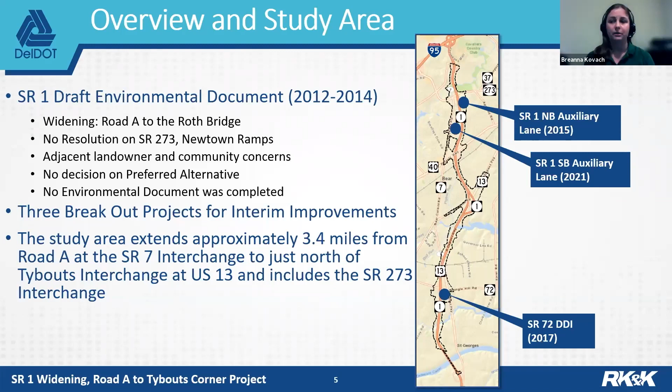Next slide, please. So the purpose and need of this project, why we're here, why we're doing this. If you drive this road every day, you see we're here to address existing and future traffic congestion on SR1, between Road A and the Tybouts Corner interchange, during AM and PM peak hours especially. And with the needs, accommodating those existing and future traffic, improving the travel times, especially by eliminating those SR1 bottlenecks. A big one that we see today is at SR1 and 273, so we're really trying to improve the operations and safety at that interchange as well.

Next slide, please. So I just want to start off too by mentioning that this map is rotated 90 degrees, and you'll see the map rotated in future slides as well.

To the 90-degree rotation. So just to orient yourself, it fits a little bit better this way on the screen.

So what this project includes versus what it doesn't include that maybe the previous study had included. So just to reiterate, we are including the widening of SR1 from Road A near that mall to just north of Tybouts Corner Interchange. It also includes the construction of the new Newtown Road ramps, and the reconstruction of the SR1 and SR273 interchange. What this project doesn't include at this time is the reconstruction at the Tybouts Corner interchange where 13 and SR1 come together.

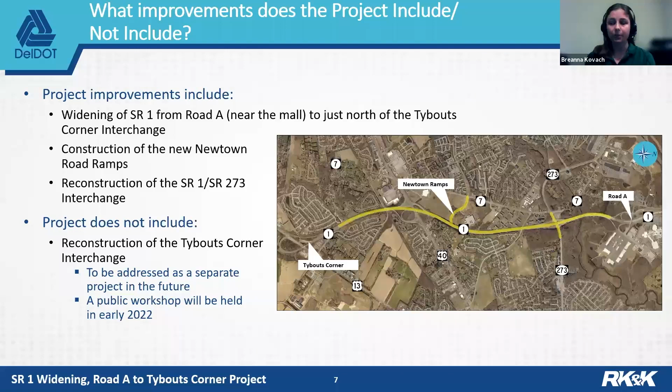So with that being said, I'm going to turn it over to Carey at this point, who's going to talk to us a little bit more about the design aspects of the project and give you a refresher on the alternatives.

All right, great. Thanks, Breanna. So again, as Breanna just mentioned, there are really three main components to meet the purpose and need for this project. A little bit bigger map: we have SR1 widening, the new Newtown ramps, and the SR1 and SR273 interchange reconstruction. We're going to talk about all three here this evening.

SR1 is an existing 2 through-lane section from Tybouts Corner up to Road A in both directions, with some of those auxiliary lanes which have been recently constructed. Next slide, please.

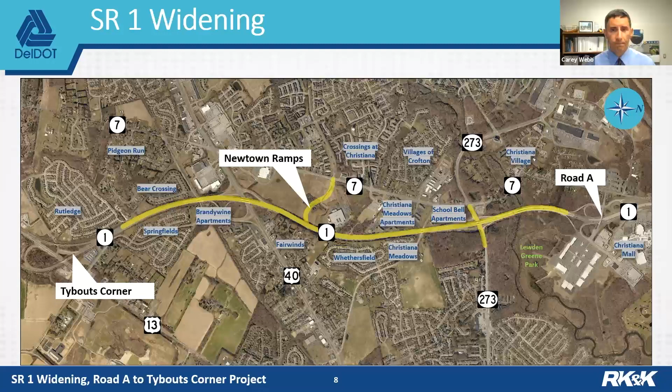Just showing a cross-section of the SR1 widening. This is taken between the Newtown Road ramps and 273, looking towards the north. In this slide, the existing pavement is shown in black, and the highlighted areas indicate the new pavement widening in each direction. So the widening will provide 3 through lanes in each direction with auxiliary lanes between the on and off ramps, as well as full shoulders. Please note that the widening would occur within the existing SR1 right-of-way. Next slide, please.

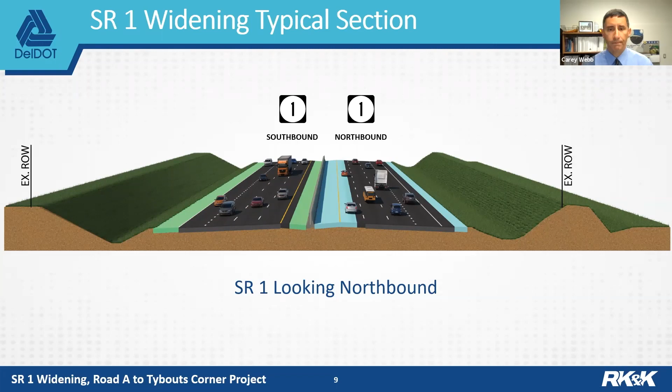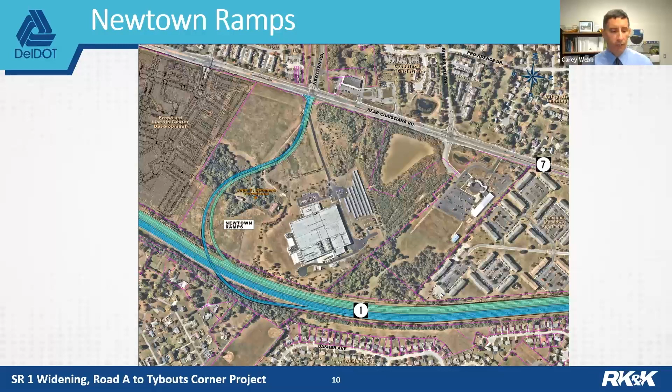This is a blow-up, zoomed-in view of the Newtown ramps, with the southbound SR1 off-ramp to the existing SR7 signal at Newtown Road shown in green, and the SR7 to northbound SR1 on-ramp via a flyover bridge shown in blue. These Newtown ramps redistribute traffic from the SR273 interchange and help address the SR1 southbound queuing and weaving issues that you see today at 273. Next slide, please.

Now we're going to take a closer look at the SR1 and 273 interchange, where the existing challenges include 3 closely spaced signalized intersections on SR273, and the heavy southbound SR1 to southbound SR7 dogleg movement. To recap, we'll now quickly review the 4 build alternatives at this interchange that we presented at the virtual public meeting back in November of 2020, and then describe how the recommended preferred alternative has evolved since that meeting. Next slide. It's the dogleg movement.

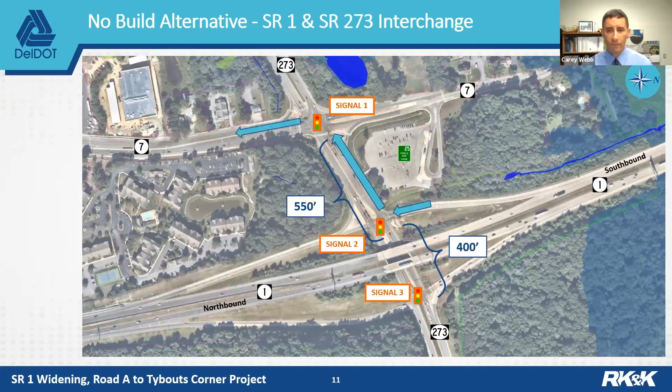Okay, so again, these next 4 slides are going to recap what was presented back in November of 2020. This was alternative 1, the tight diamond intersection interchange. Signals 1, 2, and 3 remain in their existing locations as they are today, and the ramps maintain a very similar footprint as they do today. The main change was the addition of a channelizing median to prevent that dogleg movement from SR1 southbound to SR7 southbound. Motorists wishing to access SR7 from SR1 southbound would need to utilize the Newtown Road ramp. This restriction was common to alternatives 1, 2, and 3.

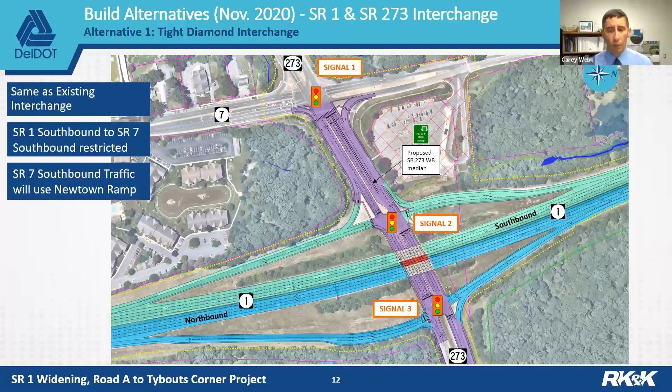Also wanted to note that all alternatives included a sidewalk connection on the south side, or eastbound 273, from SR7 heading east to connect to the existing sidewalk network, and on the other side of the interchange at Wedgefield Drive, as well as bike lanes on SR273 throughout the project limits. Next slide, please.

This was alternative 2, which featured a southeast loop ramp, in that quadrant there. Here, signal 2 remains in its existing location, and the ramps to and from southbound SR1 maintain a similar footprint. This does include the previously mentioned channelizing island along westbound 273. And here, access to and from northbound SR1 is modified to relocate signal 3 further east to provide greater intersection spacing and doubling the storage between signals 2 and 3. Next slide, please.

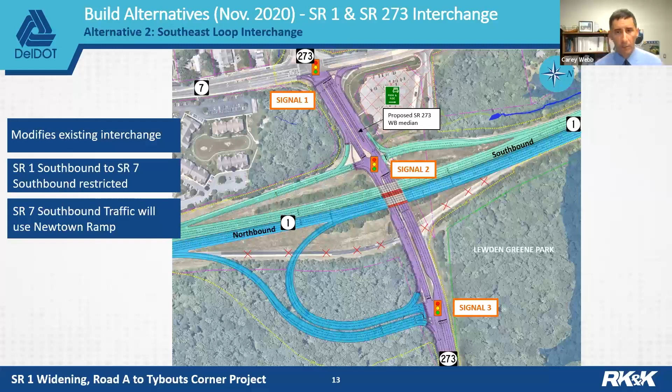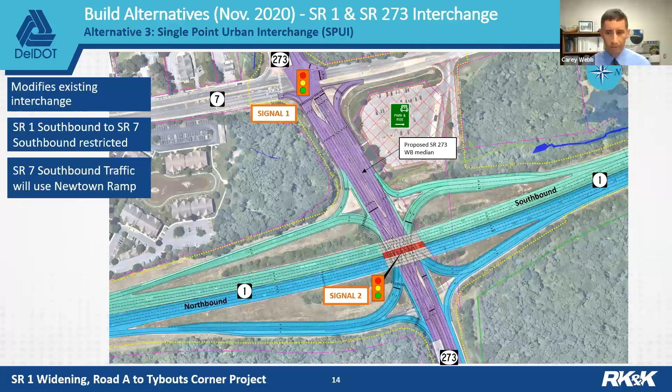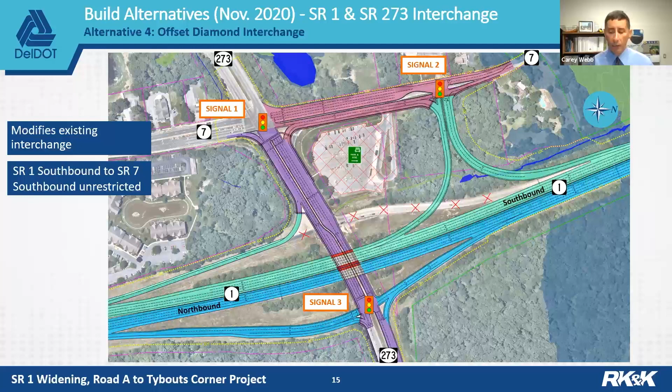Now Breanna is going to summarize the timeline of how the project has evolved since then. Thank you, Carey. As Carey mentioned, back in November 2020 when we met with the public, we had presented these previous alternatives. At that point, with the comments and feedback we received, it seemed the preferred alternative was alternative 4 due to the access to southbound 7 at the interchange, because alternatives 1 through 3 restricted that southbound SR1 to southbound SR7 movement.

Since then, we've had quite a few other meetings, as you can see here. These are just the big ones we wanted to highlight. We met with some folks from the Crossings at Christiana who had very specific questions and concerns, factoring in the Newtown Square shopping center traffic. Again, they preferred alternative 4 due to the travel choice. At that point, the team had thought, okay, this is the route we're going to go, due to some of the operational impacts and benefits of that alternative, as well as the impacts to environmental resources.

At that point, we went to our DelDOT management and presented that as the recommended preferred alternative. They advised, hey, we should really meet with the legislators again to brief them, and then meet with the Christiana Village, because that obviously was going to be a little bit closer to the town of Christiana.

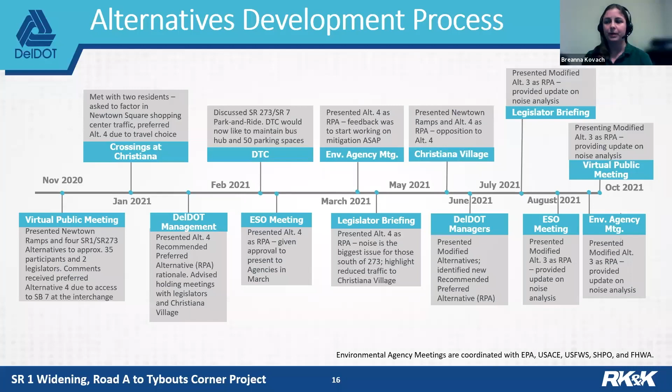So with that being said, I know that there was a lot of information that I just threw your way. I'm going to turn it over to Carey now, who's going to talk to you a little bit about the modification that we had done for alternatives 1 through 3 and talk a little bit more about the design efforts again. So Carey. All right, thank you.

So as we discussed back in November, the original alternatives were intended to maximize use of the new Newtown ramps, drawing as much traffic away from the 273 interchange as possible. However, as Breanna just described, after receiving public feedback and hearing the desire for some motorists to continue making that dogleg movement, especially in off-peak hours, we performed additional traffic modeling to see if that hard right from southbound SR1 to southbound SR7 could work.

And that's what we're showing here in yellow. It does work, so we can incorporate this movement, shown with the yellow arrow again, into modified alternatives 1, 2, and 3. So please note this hard right movement is very similar to the movement required just to the south to access the Eden Square Shopping Center on US 40 from southbound SR1.

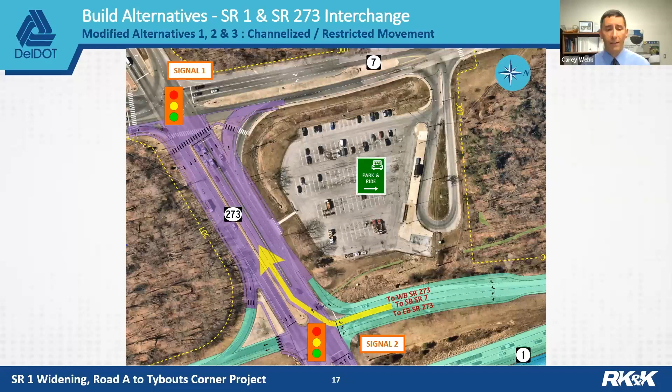So now Pat's going to take us through the revised impact comparisons of these modified alternatives.

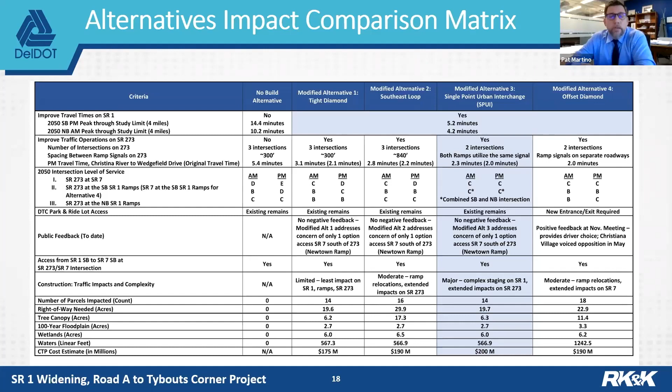The bottom portion of the matrix looks at a lot of the environmental impacts that we're considering for each one of the alternatives. And you can compare how each one of those stack up against one another. You can see that alternative 3, for instance, and alternative 1 sort of carry the least amount of impact in terms of right-of-way impacts or property impacts, and also the environmental impacts as well.

So again, this will be available on DelDOT's website along with the rest of the presentation after the workshop, so you can look at these numbers a little bit more closely. Okay, Carey, I'll turn it back over to you.

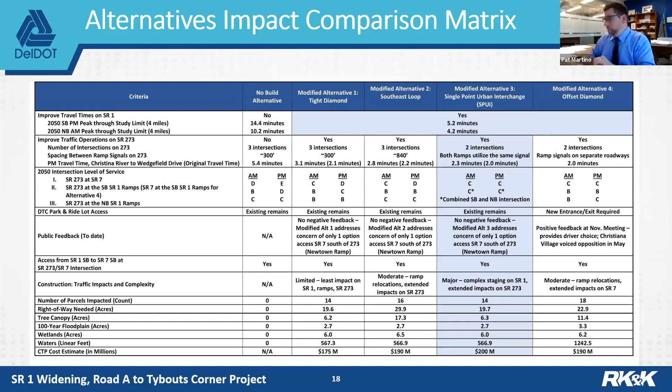All right, next slide, please. All right, so now we're going to describe, again, we've kind of hit on a lot of these things with alternative 3, but pointing out the modification to the alternative 3 and sort of why it's going to be falling out as the recommended preferred alternative.

So big change, obviously, is that the southbound SR1 to southbound SR7, that dogleg movement we've talked about, is now unrestricted. So you can make that hard right that we'd shown with the yellow arrow on a previous slide. So that is now incorporated into this alternative.

So from a traffic modeling standpoint, the modified alternative assumes 50% of southbound SR7 traffic. So those trying to access SR7 will use the Newtown ramp. So the ramp further south just provides that travel choice to either continue down SR1 to access 7 or still get off here like you normally would today.

Again, this combines the 2 existing ramp signals on either side of SR1 into a single signal to accommodate all the ramp movements. And this does maintain the existing park and ride lot and access. Next slide, please.

Just to reiterate, the modified alternative 3 still includes the SR1 third lane widening and the Newtown Road ramps. What really fell out is that modified alternative 3 solves the project's critical traffic congestion issues best by significantly improving travel times, as Pat had mentioned, on 1 and 273.

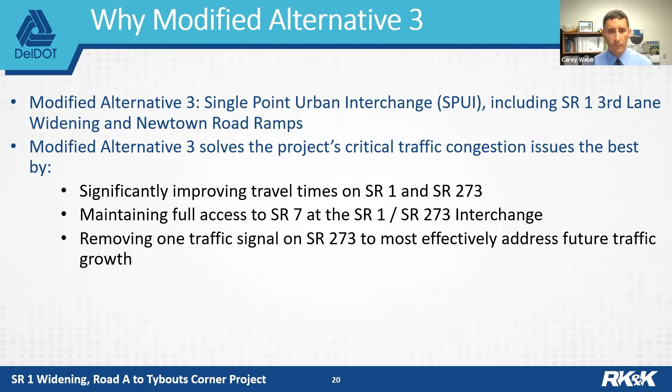So what is a SPUI? The single point urban interchange is a grade separated interchange design where all the freeway ramps begin or end at a single signalized intersection on the arterial road. In this case, the arterial road is SR 273. It's a great solution for locations with limited right-of-way and/or heavy left turn traffic volumes to and from the freeway ramps, which is the situation we have at this interchange.

The main benefits are improved safety, increased efficiency and capacity, and fewer traffic signals.

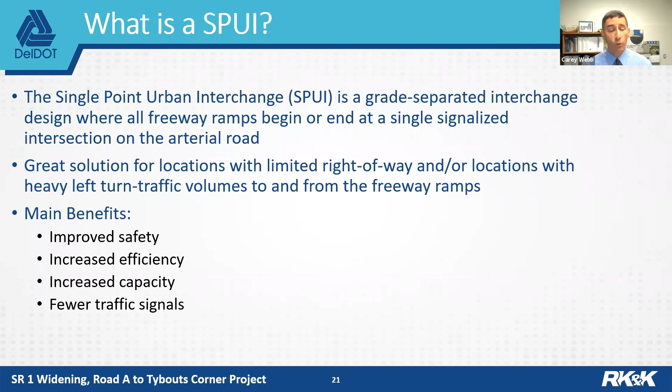To help better visualize the single point urban interchange and how it works, we'll now show a short video prepared by the Missouri Department of Transportation and HNTB.

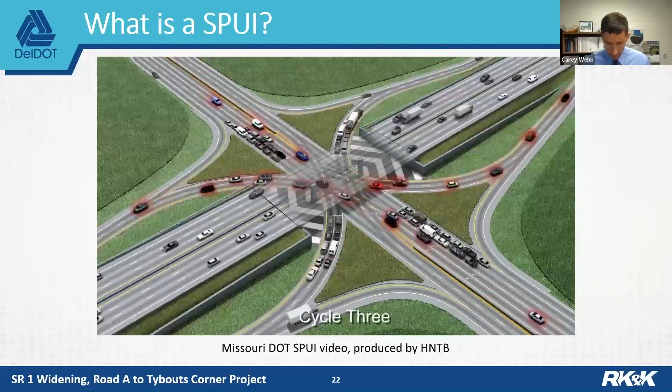This animation shows a single-point urban interchange that links a freeway on top with a major thoroughfare or arterial street that passes underneath. The name single point refers to the fact that all through traffic on the arterial street, and all traffic turning left onto or off of the interchange, can be controlled from a single set of traffic signals. There are three traffic signal cycles: the first for through traffic on the arterial street that is not turning; cycle 2 for traffic leaving the freeway and turning left onto the arterial street; and cycle 3 for traffic leaving the arterial street and turning left onto the freeway. You've just seen how a single-point urban interchange works.

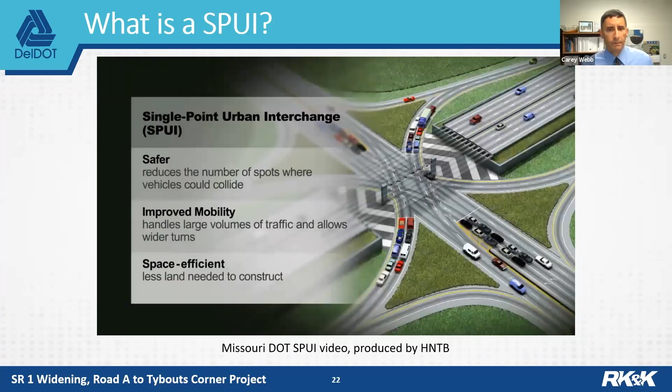Please note that Delaware does not currently have a single point urban interchange, however they are in some surrounding states. This animation shows a single...

Can't get enough of that video.

Also note this is not the same type of interchange as the diverging diamond interchange further south at the SR-72 and SR-1 interchange.

Now we're going to talk a little bit about how pedestrians and bicyclists would move through this type of interchange. The next three slides are entitled, in the lower right, cycles 1, 2, and 3, corresponding to what we just saw in the video on how the traffic signal is phased.

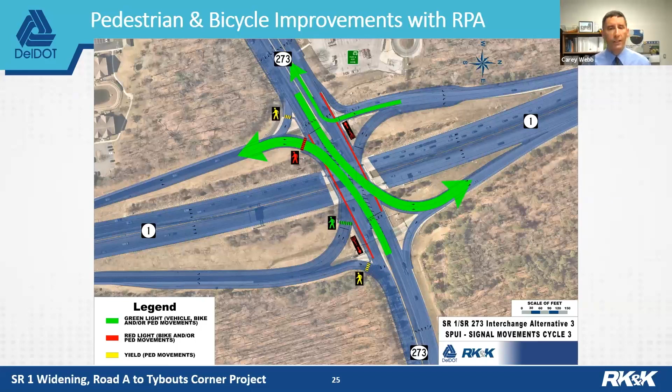Thanks, Carey. DelDOT is working on an environmental assessment, or EA, document for the project. Over the next couple slides, I'll give an update on the environmental analyses that have been occurring to support the EA.

In August of this year, the Federal District Court vacated the Navigable Waters Protection Rule, which defined the waters of the U.S. The Environmental Protection Agency and the U.S. Army Corps of Engineers have reverted back to the pre-2015 definition of waters of the U.S., based on two Supreme Court cases commonly referred to as SWANCC and Rapanos.

In response to these new definitions, DelDOT has updated the wetlands and waters delineated features to reflect the new current guidance, as well as recalculated the impacts. Overall, this has resulted in an increase in impacts from what was presented last November in 2020.

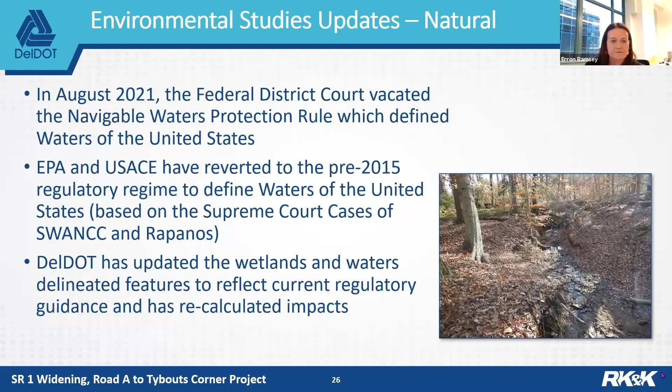Section 106 of the National Historic Preservation Act requires federal agencies to consider the effects to historic properties on federal actions. Under the previous 2012 project activities, which Brianna described at the beginning of the presentation, the Section 106 process was initiated for the nine-mile corridor.

Preliminary archaeological and historic architecture surveys were completed.

Under the current effort, the 106 process has been reinitiated, and the area of potential effects, or APE, has been defined. This is shown in the light yellow on the map on the screen.

The blue is the second project to the south around the Tybouts corner interchange. The results of the 106 consultation will be presented in the environmental assessment.

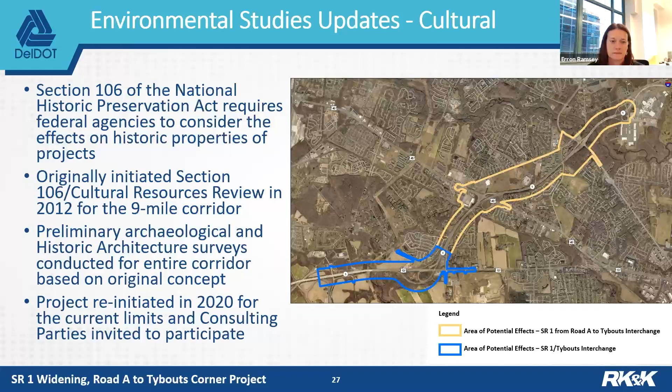In addition to the natural and cultural resources, and Kevin will give an update on the noise, other resource analyses that we've been conducting include communities, parks, air quality, and hazardous materials.

Kevin, you can give an update on the noise analysis.

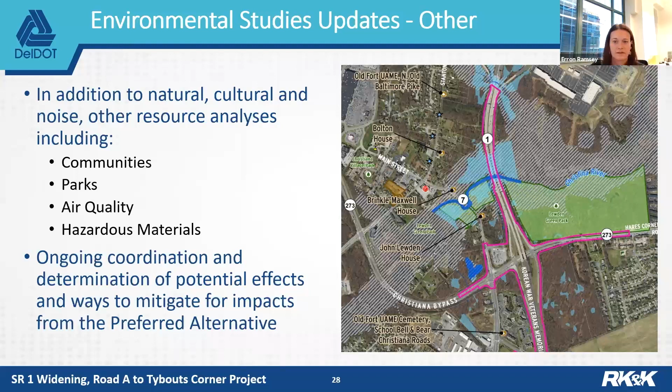Thanks, Erron. As Erron noted, noise analysis is part of the NEPA process and follows DelDOT's noise policy and federal regulations. We use a computer model developed by the federal government called the Traffic Noise Model, or TNM for short, to assess noise impacts, and then if noise impacts are identified, possible mitigation.

The general process is the noise engineers coordinate with the highway design engineering team to model the roadways three-dimensionally as designed, along with the topography outside of the roadway that's not affected by the roadway work, to assess the general noise produced by the roadway.

To get some of these results, we also coordinate and facilitate with traffic engineers to define the traffic noise that would be the loudest hour of the day, which is as required by DelDOT and Federal Highway Administration. The output of our noise modeling results is the predicted loudest hour noise level.

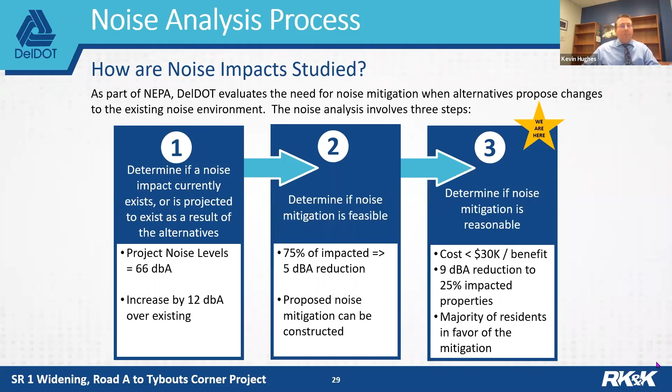The other thing we did was take a look at the common noise environment definition again, generally between interchanges and receiving the same noise from the same source. Here we took a look at communities that were across the road from one another. In this case, we took the Whethersfield Christiana Meadows and combined that with the apartments to see what that would do, because again we could define them as one common noise environment.

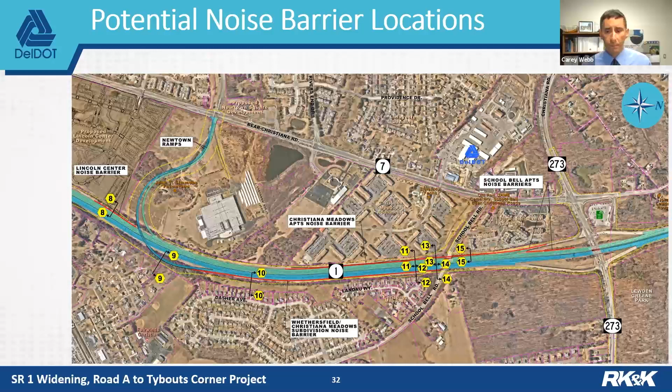So we talked about those yellow hexagons, here's where they come into play. We took a look at some cross sections, just going to show you a few sample ones here for the potential noise barrier locations.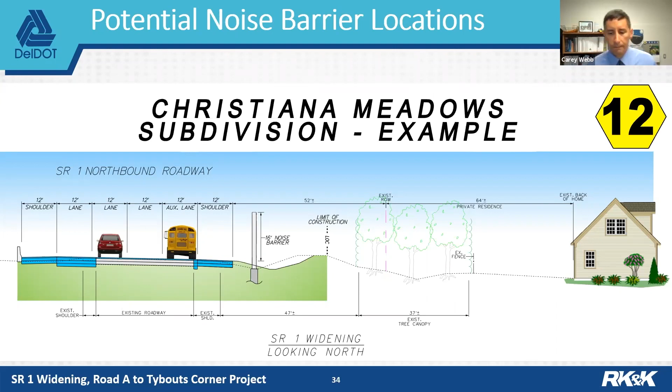As Kevin mentioned, not all areas meet the feasible and reasonable noise barrier criteria. In those areas, we are exploring visual mitigation opportunities, which could include retaining walls with a road barrier to preserve existing slope vegetation, enhancing existing berms where right-of-way allows, and possibly adding fencing or screening where feasible.

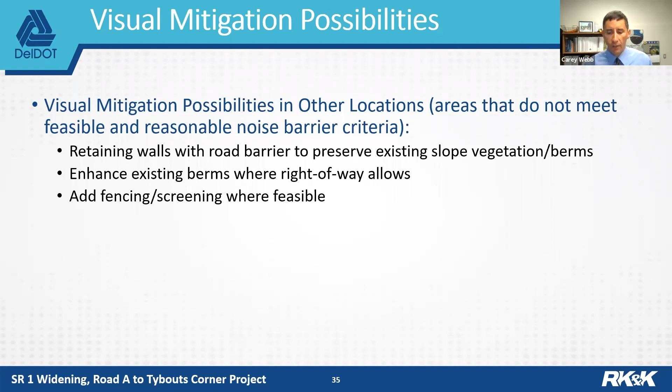All right, so now we're going to turn things back over to— I'm sorry, I got one more cross section to look at. This would illustrate that retaining wall situation. This is Bear Crossing, on the northern end, adjacent to southbound SR1.

Here again, the blue is the roadway widening or reconstructed pavement. There's a well-vegetated slope between SR1, which is higher than the existing ground, and the residences in this location. The goal would be to minimize disturbance to that visual screen the vegetation provides, so by putting in a retaining wall, we hope to minimize disturbance to that existing vegetation.

All right, so now we're going to turn back to Matt and Pat to wrap things up.

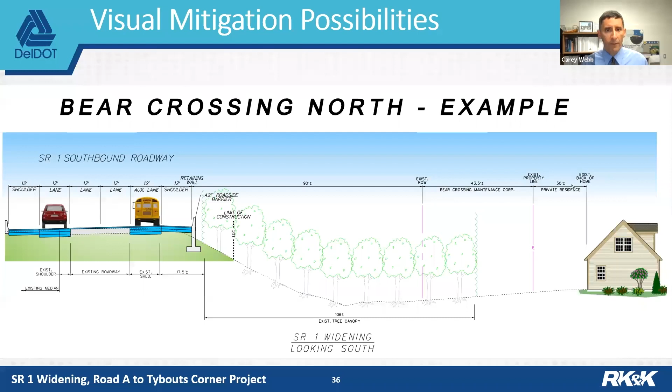In November 2020, we had our initial public meeting with the purpose and need and the alternatives. Following some feedback, there was a follow-up meeting with Christiana Village. Then we refined and revised some of the alternatives, took those to the legislators and our environmental services office in preparation for this meeting.

And with that, I'll hand it back over to Pat to finish out the presentation.

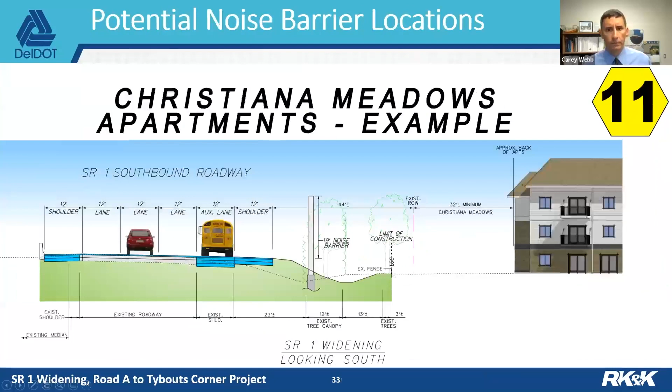Respond. Kim, would you mind going back to slide 19, please? Okay, great. So exactly.

As the questioner asked, today when you get off southbound SR1, you make this left, you have to wait at a signal here. And if it's timed, the timing isn't great, and you make the left, then you have to stop at another signal at the other ramps. So under this recommended preferred alternative, that is now all combined into one signal. So once you are in these lanes to make a left to continue eastbound on 273, you're only waiting at one signal. So those three cycles that we talked about, once you get that green light, you don't have anything to stop until you get further east on 273.

All right, thanks, Carey. Kevin, there's a few questions related to noise, so I'll start with the first that came in from Eric. The question is, will the noise abatement include planting trees to abate the noise and also act as a visual screen? I think that's a Kevin and Carey question. Kevin, you want to start off?

Sure, Pat. Thanks. So basically, trees as noise abatement, it doesn't work real efficiently when you're planting them. The studies have shown that you need about 100 feet deep, meaning from the roadway to your house, full of trees as well as underbrush, to completely block the path of sound. Basically, one of the rules of thumb is if you can see through it, you can hear through it. The sound waves will make their way through it. So planting for noise abatement normally isn't done.

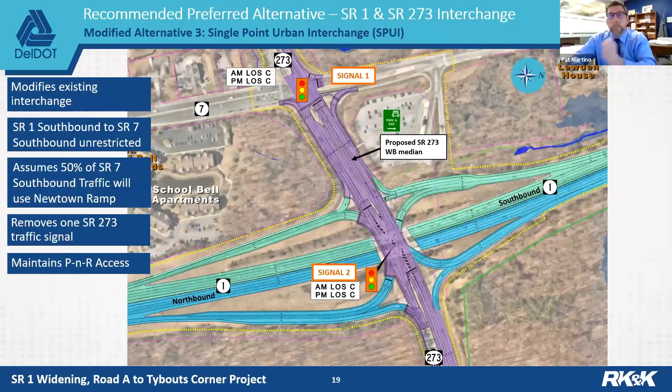Okay, the next question comes in from Joseph, and it may be worth going back to the slide that had the matrix of the noise locations. I think that's slide 30.

Joseph's asking, how is Zone 10 any different than Springfields area? How come Springfield and Rutledge aren't joined together in the noise study? Joseph is also asking, have you heard the jake brakes of the trucks coming down grade from Route 40 to Tybouts Corner?

So to answer the Zone 10 question, Zone 10 is a common noise environment far removed from the Whethersfield and Christiana Meadows subdivisions. They are separated by the future Newtown ramps. We defined common noise environment per federal regulations and guidance manuals that explain how to combine communities into a common noise environment, and they are considered different. They experience similar noise and noise sources, but are a different zone, so they wouldn't be compared. In terms of Springfield and Rutledge, Rutledge is not currently considered part of the study as we've laid it out.

It will be part of the Phase 2 project when that gets underway. Springfield's was combined - it's not shown on our map, as I mentioned earlier, but it was combined with Bear Crossing to take a look if that would work. There are impacts in those communities, and that is true from noise, but we were not able to develop a barrier system that would meet the criteria set forth in DelDOT's noise policy, and therefore it's not effective and not recommended for construction.

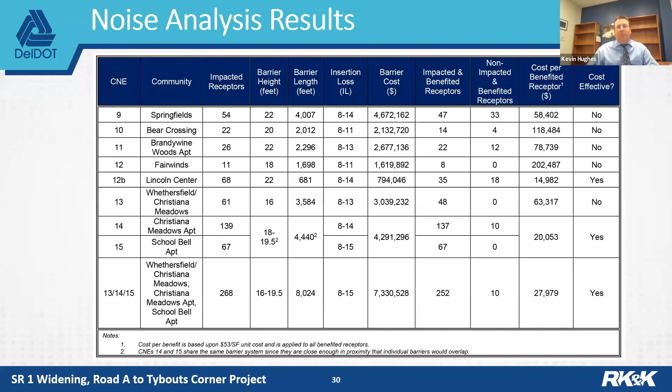Okay, the next comment comes in from Drew. Drew is asking, when will these documents be available on the web? Breanna, do you want to take that? I could take that one, Pat.

So tomorrow we should have the presentation itself in a PDF format uploaded to the website. However, it's going to take us a little bit longer to get the video processed and prettied up on there, so hopefully sometime early next week for the video. Thanks, Breanna.

Okay, the next question, and Breanna, I think this one will be for you as well: when is construction estimated to begin, and what's the anticipated project duration? Yeah, so let me unmute myself.

So for this one, as we mentioned earlier, we're currently in the very early stages of design for this project, actually in the project development process. So as mentioned in the presentation, the goal is to have the environmental document out for review in 2022. And that's kind of the key mile point right now that we're shooting for, because once we have that approved, the team will better be able to evaluate the design schedule moving forward, as well as how we'd like to actually phase out the project.

So right now we don't have that hard construction date set. But again, the key is once that environmental document is approved, we have the ability to move forward and plan that design schedule, and also the ability to break out the project into smaller projects if funding becomes available sooner to construct. So again, I don't really have a good answer for that at the moment - we're trying to reach that mile point in spring 2022, and then from there, we should have a better idea of how we're going to phase this and if we're going to break it up into multiple projects or not.

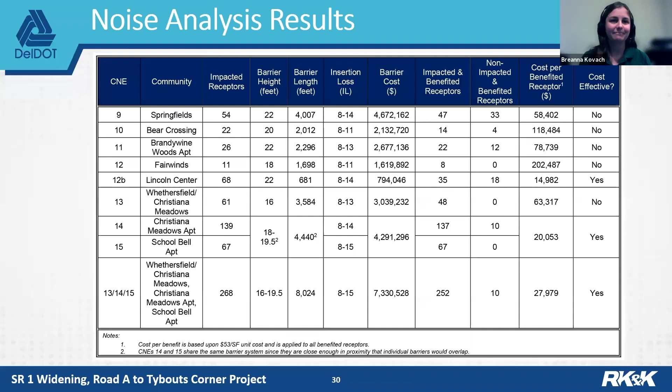Okay, I think we've answered all the questions that have come in tonight. We'll go back - we have 7 or 8 questions that came in before tonight's meeting, so we'll begin to address those. I'll start out with this question here, and this is a good figure to show, or a good map to show, to answer this question.

Okay, next question is for BJ, if BJ is queued up. Hey BJ, there's concern about excess traffic congestion along Route 7 and Route 40. I would assume this question pertains to the inclusion of the Newtown ramps and directing traffic off of SR1 to Route 7 via the Newtown ramps. So BJ, could you take this one?